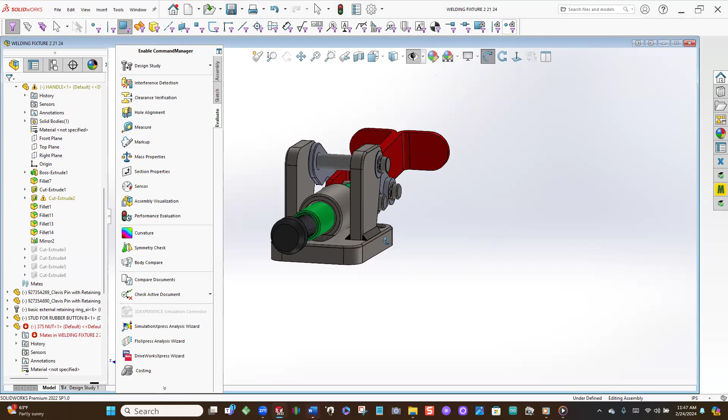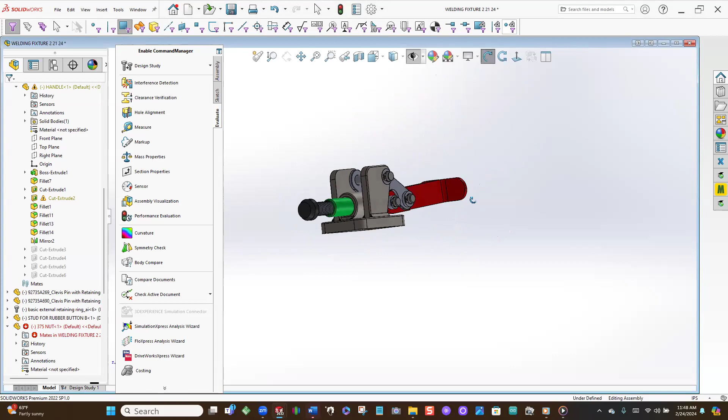All right, so what we've got here is this weld fixture that we use, and it works quite well. There's a rubber knob on the end of this half-13 stud, and this handle moves in and out, moving the stud or plunger in and out. Okay, so that's all good. That's the first thing.

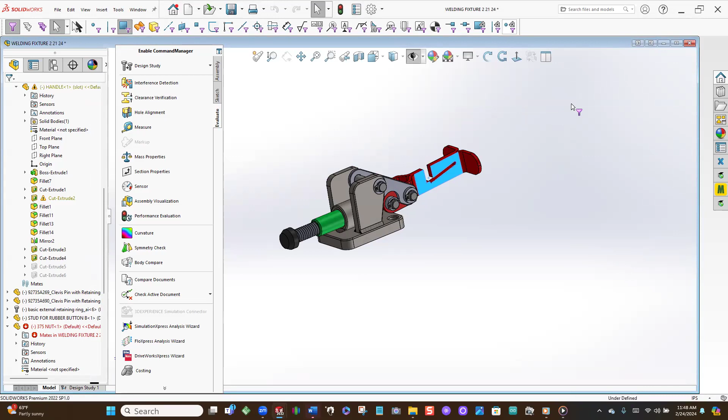All right, so I want to put on any of these components, I want to add a configuration, but first I want to see what's on there. So I'm going to left click on the handle, and it says default. Check down, I'm going to put slot, and then check the green arrow and you'll see the slots on there. Okay, I don't like that.

So in any assembly, I'm going to left click on it and the configurations are going to come up here. Let's go back to default, the way it was originally drawn. And don't forget the green check mark. Okay, green, and that slot is gone. It really is that simple. Nothing complicated about it if you do it this way.

All right, if you decide to take away material on any part that is selected to a mate, you're going to find that the mates aren't going to be there, and it's not going to work.

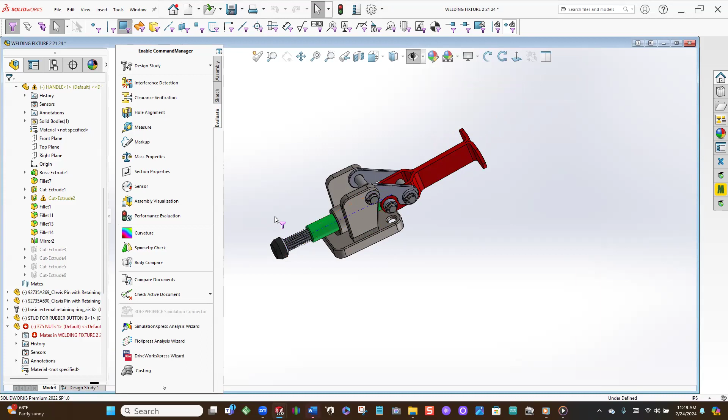Okay, but on any of these, you're going to left click on the button, go to the arrow, and you're going to see there's all kinds of other stuff here you can add. But you want to add a configuration, so you're going to right click, add configuration.

I'm going to call it bingo. You call it whatever you want. Okay, but you see, even though we're in the bingo configuration, there's nothing changed here.

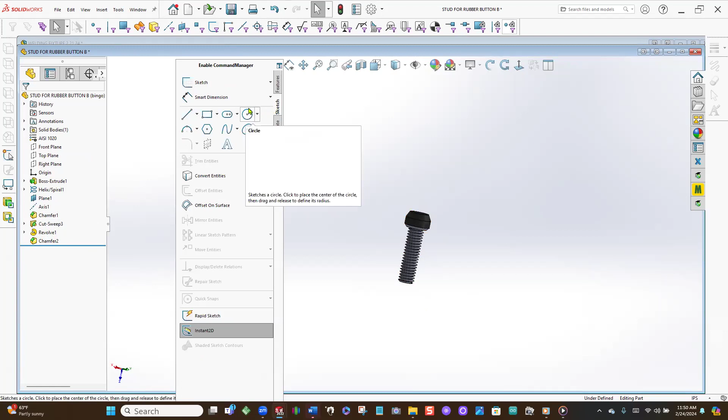Let's go to sketch. We're going to sketch on this plane, okay? And we're going to sketch a slot like this here. Go to features, extruded. You can do anything you want to, but I think it's important to select something that you're easily going to be able to see.

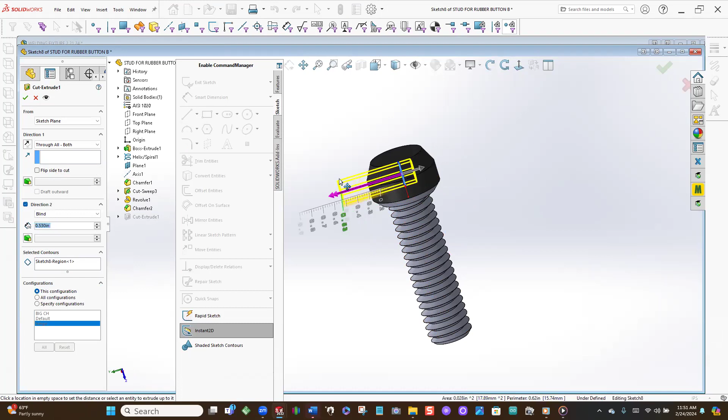Okay, there's this slot. Let's go back and change that to through all both in this configuration. And I think what we should do is, over there, okay, and we're going to call that bingo, okay?

So let's go back to configurations. See where it says bingo, that's the one that we're being used. But if we wanted instead to go back to default, I'm going to click on that, and you'll see that the slot in there is gone.

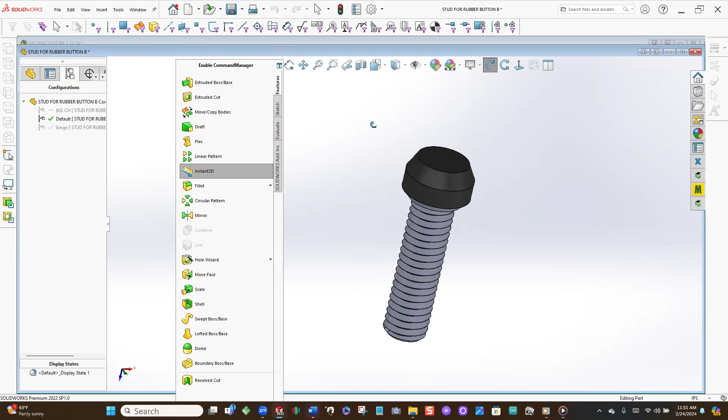All right, so let's go Control Tab. All right. And I don't see that anywhere. So let's click on this rubber nut, rubber washer here.

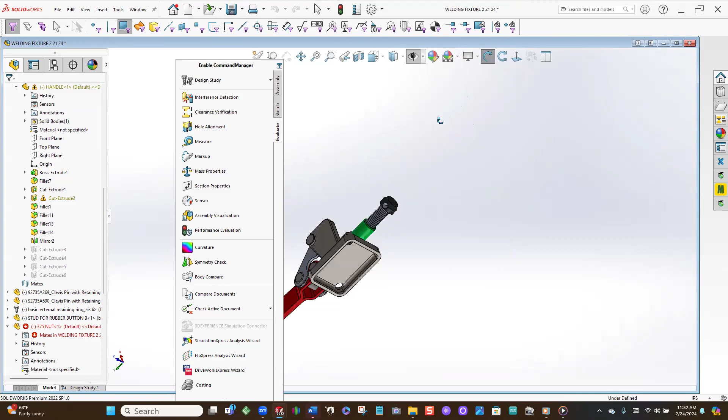It says default at the very top. Okay, let's come down to bingo. And then when we select bingo, there's a green check mark, and you'll see that the slot is in there. Okay, good enough. Now let's go back to bingo here, and we'll go down to default, and that area will be back where it was.